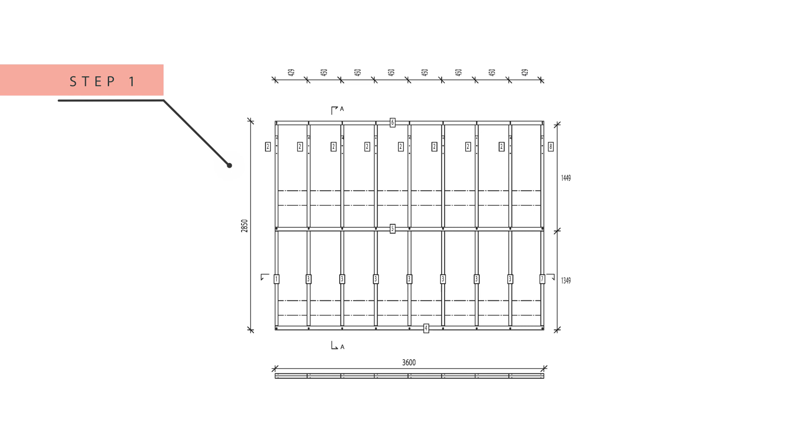Step 1. Review the floor plan and count the number of wall panels. Check all wall panels are supplied. Step 2. Lay the wall track on the ground or on an assembly table.

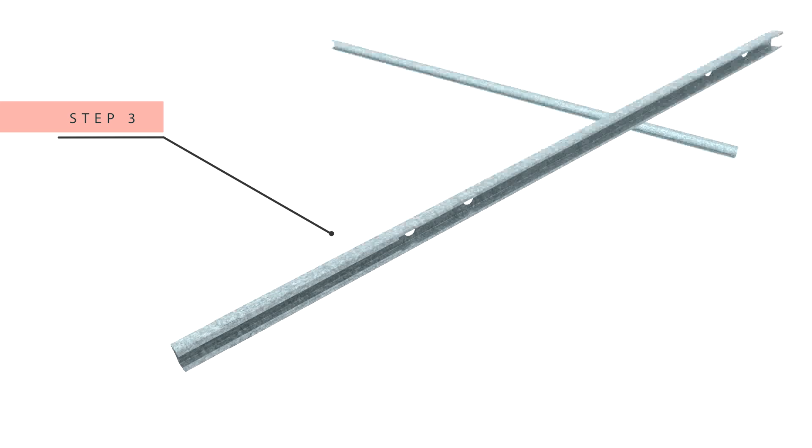Step 3. Pre-assemble the R telescopic stud into the C studs for all the common studs within the wall panel. Ensure the studs are nested web to web. Do not box the studs.

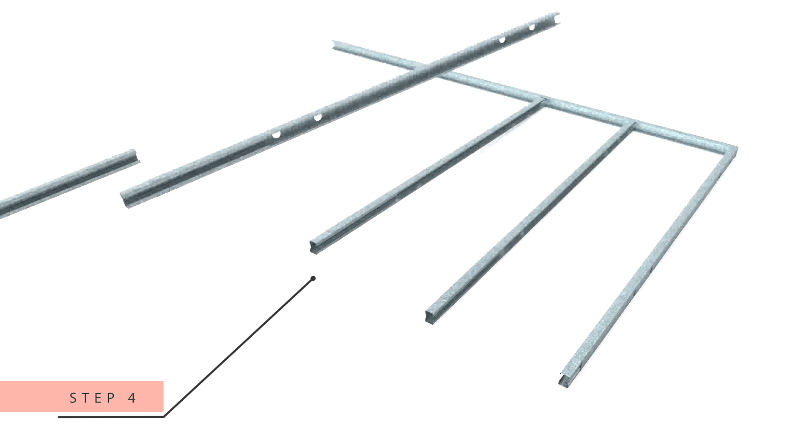Step 4. Place the swaged end of the nested C stud into the base track at the pre-punched locations, as per the wall assembly plan. Step 5. Push the nogging track through the steel studs into the correct position and ensure the dimples line up.

Step 6. Place the slotted deflection head track onto the R telescopic steel stud. Step 7. Ensure all the connection points are fitted with a 10-gauge wafer head self-drilling screw. Step 8. Flip the wall panel over and ensure all connection points on the opposite side are screwed off as well.

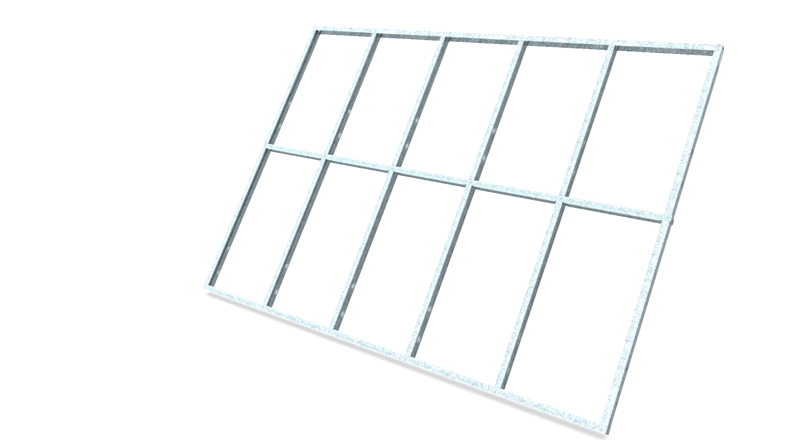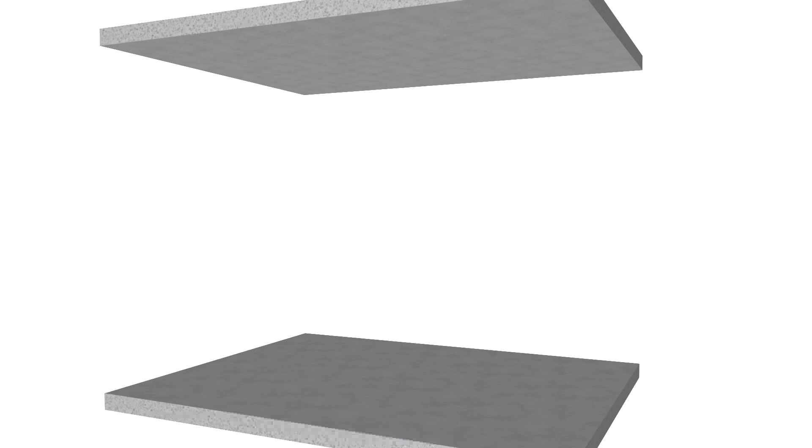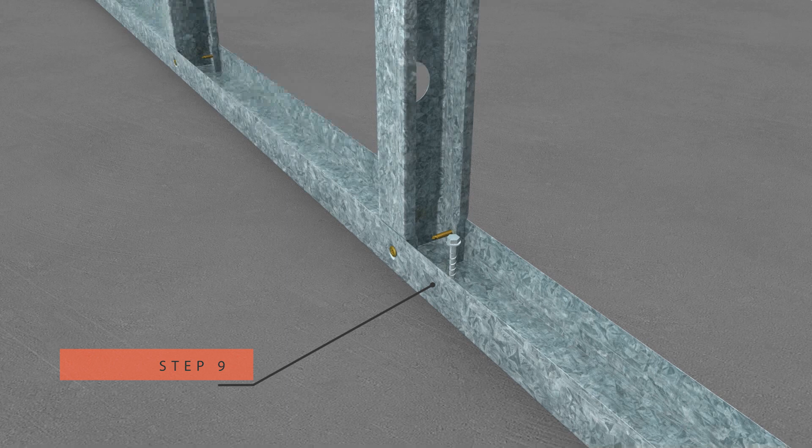Step 9. Align the wall frame with the floor set out position and anchor it using the approved fittings. Step 10. Slide the head track and telescopic R-stud up to the underside of the slab above. Align the wall panel to the set out and ensure the wall panel is not skewed.

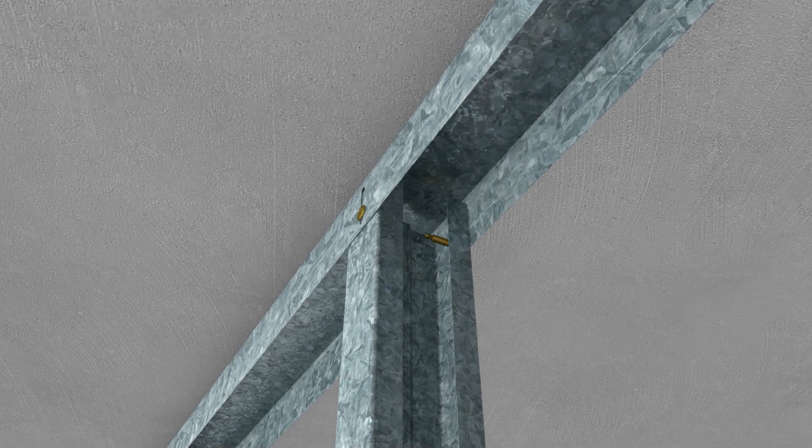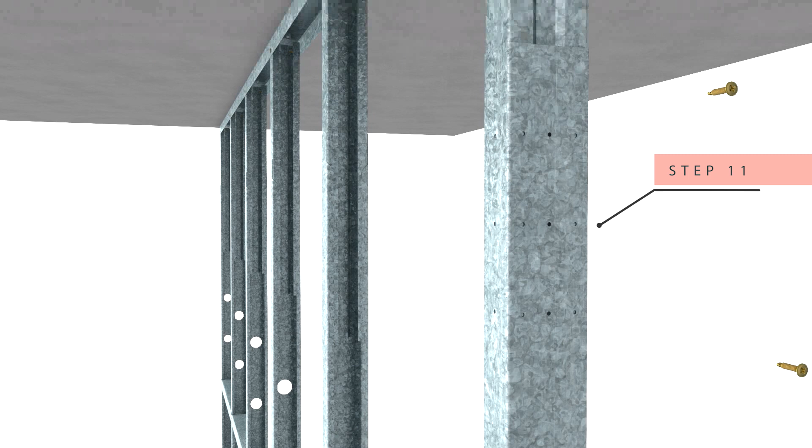Step 11. Using 10-gauge wafer head self-drilling screws, fix the R telescopic and C stud together, subject to wall lining conditions. Where the wall is unlined at the splice location, secure the two studs together using four 10-gauge screws located in the extreme top and bottom holes.